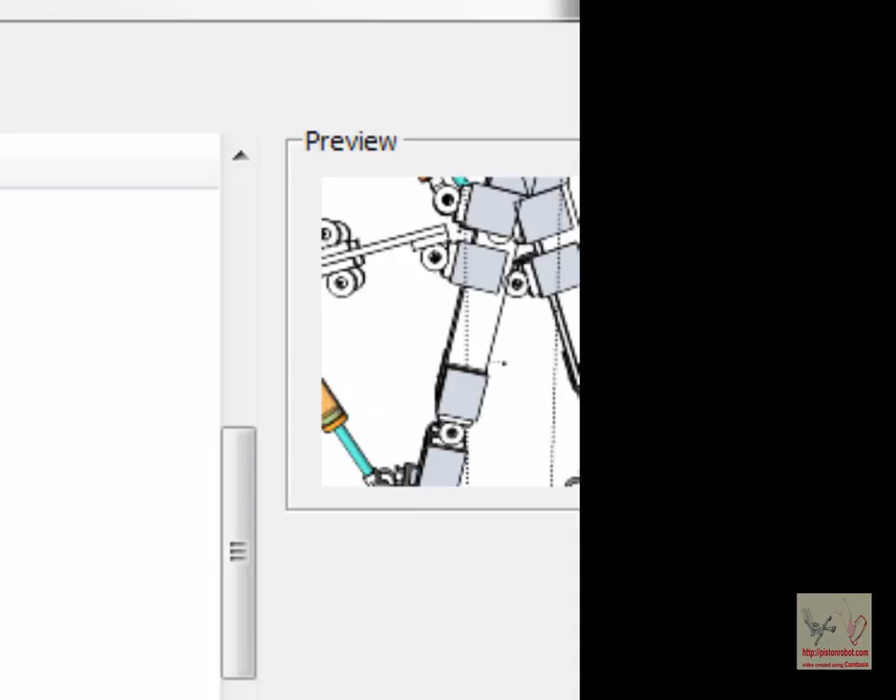Usually we'll put one or two different copies of the leg in there. This is the hip in one place, and this is the same hip extended. We're beginning to lay in how this leg is going to be moved at the level of the hip.

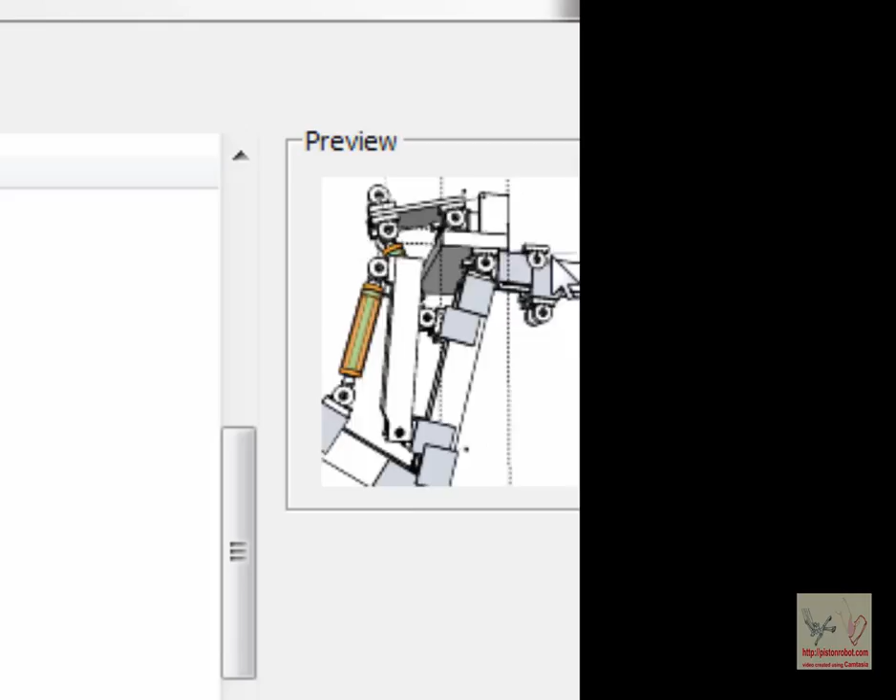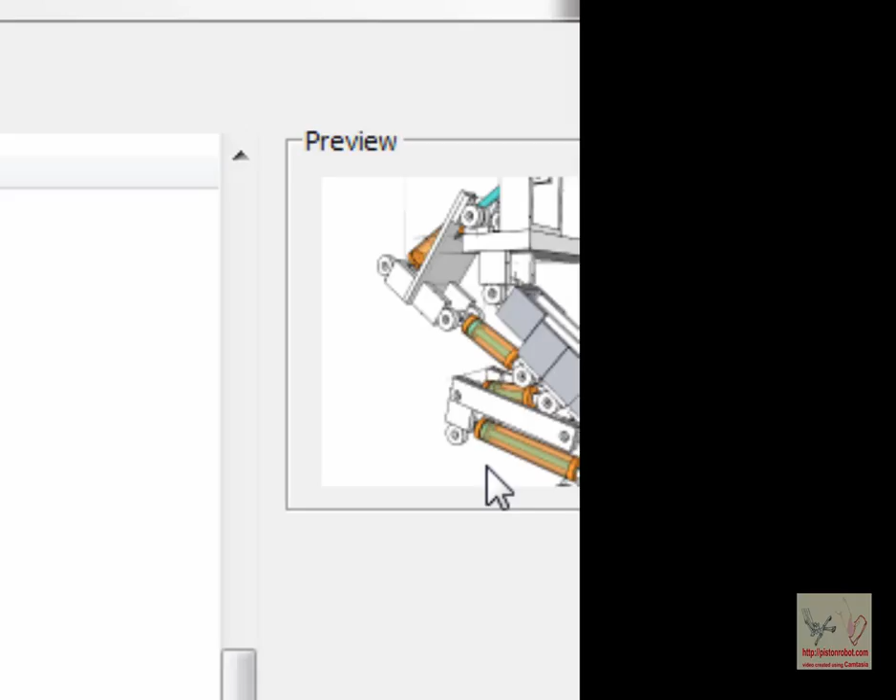Our plan is to just run through some of these. Here is the attachments that we've put together to allow the knee to flex. And we're going to get down to our final design of what we think the leg should be in order for it to work properly. These are a variety of different pistons that are allowing different actions of the leg.

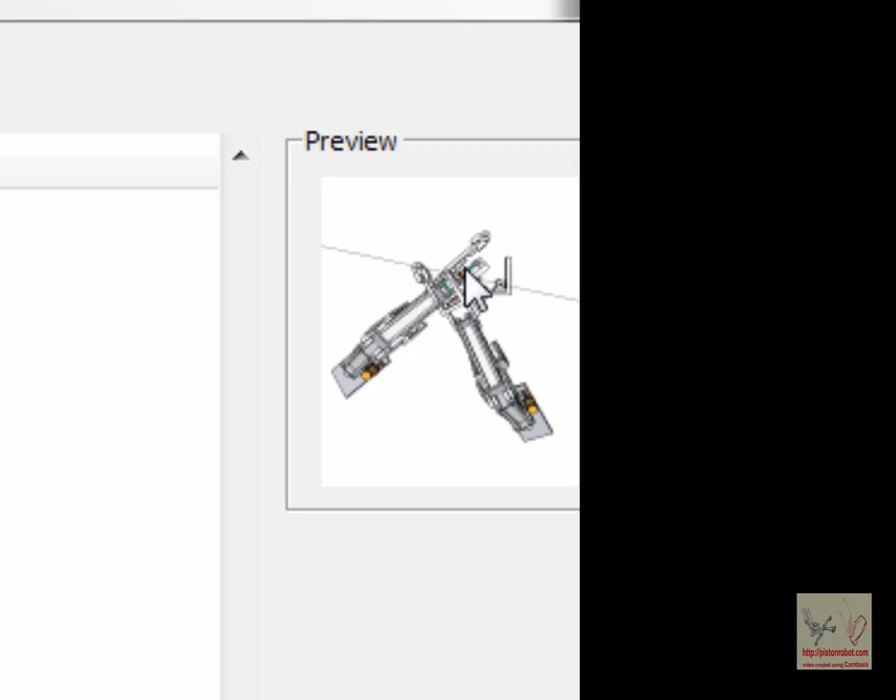We're working on the little piston that allows inversion and eversion of the foot. This is an adduction of the leg towards the midline of the body and an abduction of the leg away from the midline of the body.

These are the hip pistons that are going to allow that activity to occur. We're beginning to put in a structure here that's going to serve as the pelvis. These are the rotation points. And we've drawn in some of the pelvis, and this is some of the articulating arms of the pelvis that will allow the pelvis to move.

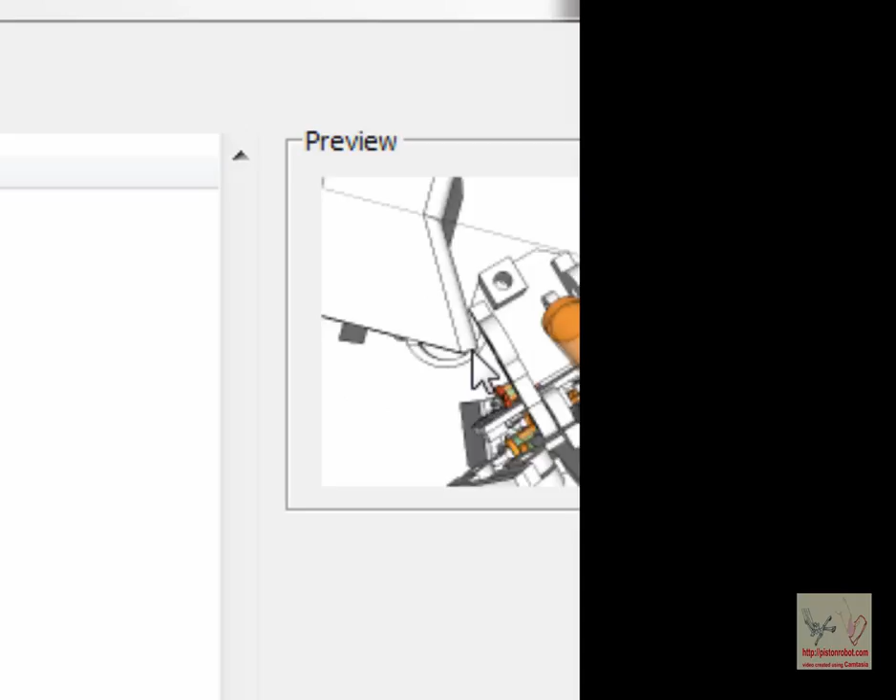And these are some drawings where we're making sure that the right side of the pelvis, or the right side of the part of the pelvis that controls the right leg, is not also existing in the space for the left side.

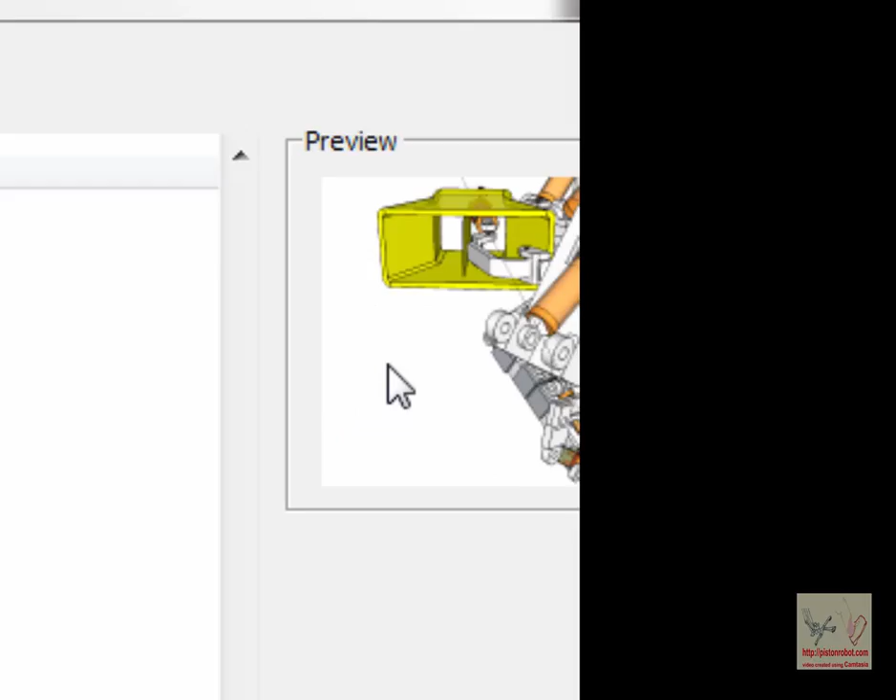And we've added some color just to help to see what we're working on. And this is the final version of the leg at this point. And we can open that and take a look at it.

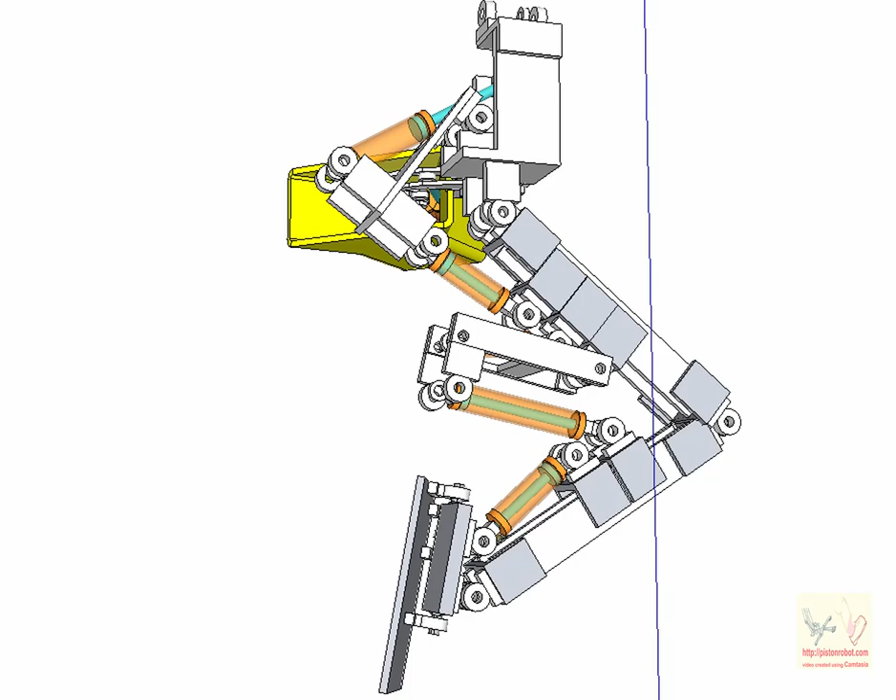And you can see that this would be, if you look at this foot pointed down, this is the heel coming to the back of the foot. So this is the right foot. This is the back of the pelvis.

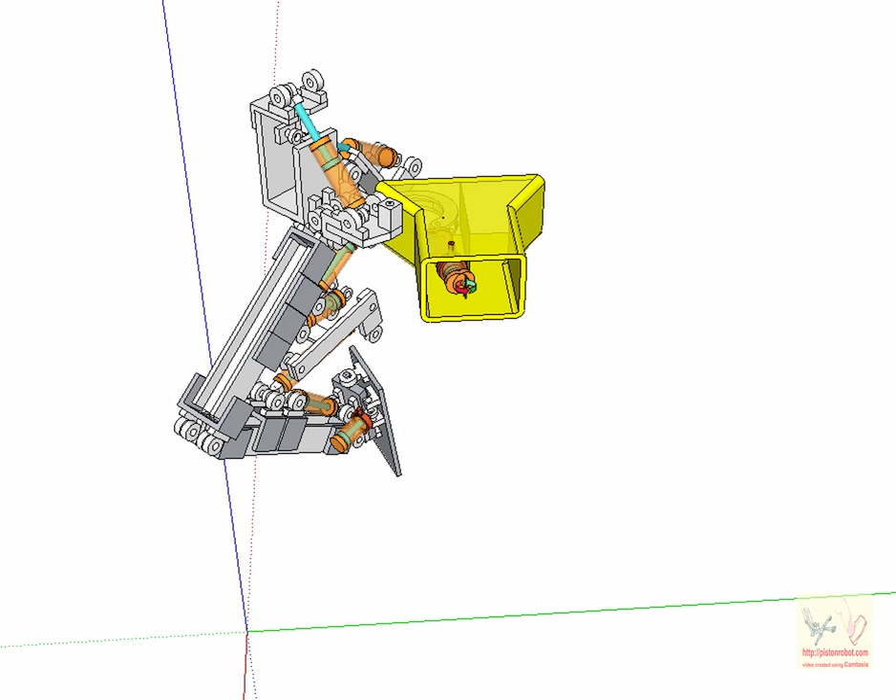This is the connection point, or going to be the connection point, where the structure that constitutes the pelvis will be attached to the rotation structure that constitutes allowing internal and external rotation of the hip.

We will bring to your attention there's a possibility our computer may have a little blue alien living inside the computer. We asked him if he would help us to show you the name of the next video in our series about PistonRobot. And he said, sure.